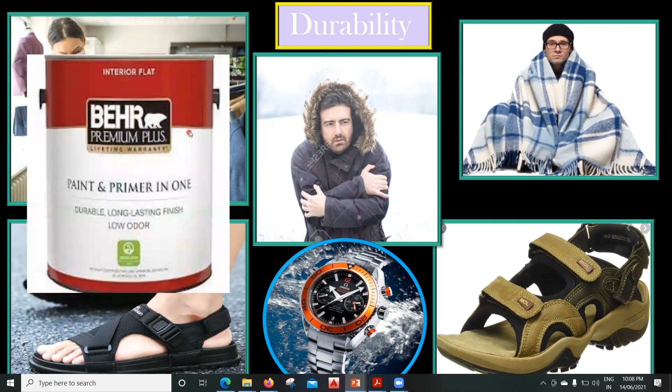Even nowadays the watches you get are also water resistant, right? So everywhere we have durability. In the same way, my structure also has to be durable in nature. And also, if you see the paint nowadays, you can see it's written durable, long lasting, something which has to last for a very long period of time, right? So having said this, we'll try to see what exactly is durability.

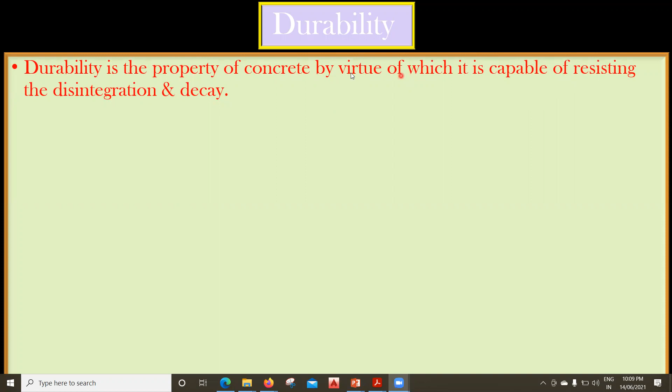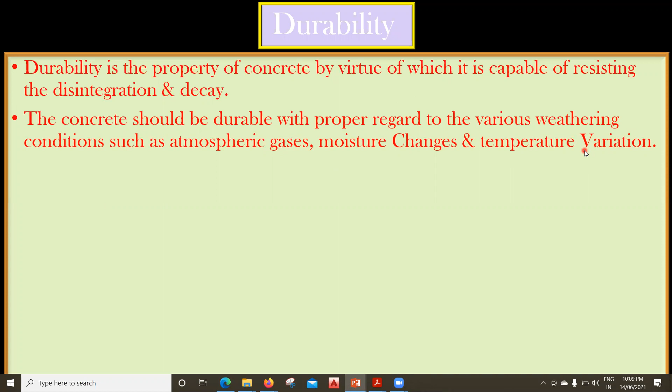So durability is a property of concrete by virtue of which it is capable of resisting disintegration and decay. The next is that the concrete should be durable with proper regard to the various weathering conditions, such as the atmospheric gases, the moisture changes, the temperature variations, as we saw, like the rainy season, the summer season and all, right?

So if you refer to Indian Standard, IS stands for Indian Standard. IS 456:2000 defines durability as: a durable concrete is one that performs satisfactorily in the working environment during its anticipated exposure conditions during service.

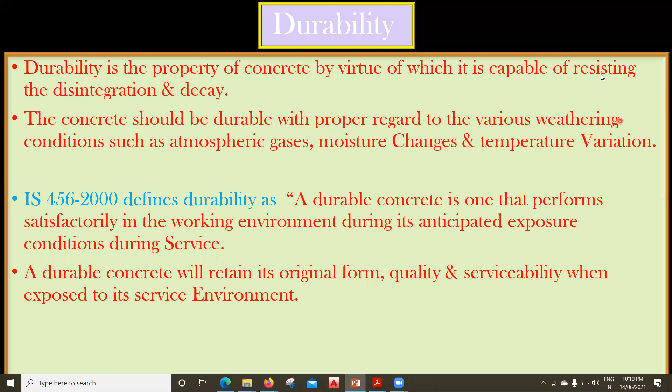The next point is that a durable concrete will retain its original form, quality and serviceability when exposed to its service environment, right? Whenever you put any structure to use, let us say you're putting up a house, we want that house to last at least 30 to 40 years, so that it will remain in the original shape. The quality will be good, it will be serviceable. That means there won't be a lot of corrosion, there is no spalling of concrete, whatever the environment may be, rainy season, winter season. So now, other than that, we have another 2 points.

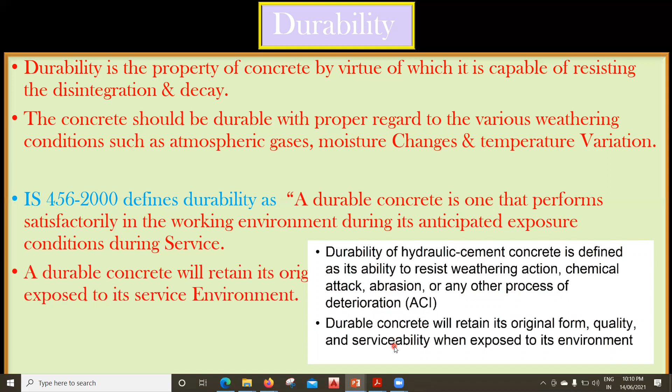Durability of hydraulic cement concrete is defined as its ability to resist weathering action, chemical attack, abrasion, or any other process of deterioration. This is according to ACI. You have to write this. If you want to follow the American Concrete Institute, which stands for ACI, this is the definition they have given: durable concrete will retain its original form, quality, and serviceability when exposed to its environment, as we have understood so far.

So up to 30 to 40 years, the house I'm putting up should be durable in nature. Durable in the sense, there should not be too much deflection, and there shouldn't be cracks, corrosion, or spalling of concrete, right? So all of this is related to durability. In the same way, this is just for a house. Now imagine the Statue of Unity.

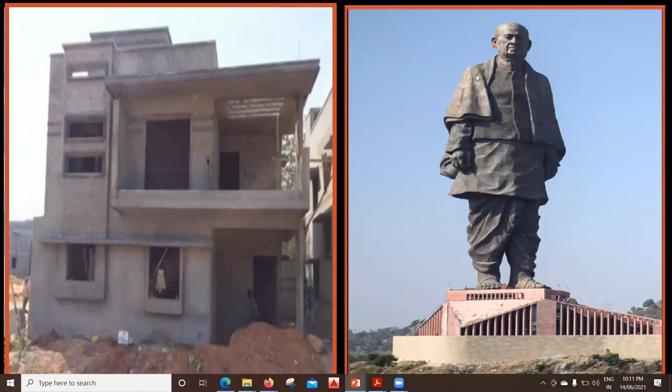So when we put up a monument something like this, we want this monument to last long for thousands of years, isn't it? And just imagine the way this statue is put up. It's almost 182-meter height, and when the height is somewhere close to 182 meters, it will be subjected to heavy winds here. And also it is on the coast of river Narmada, and also imagine the exposure conditions and all, right? So this structure has to be more durable in nature.

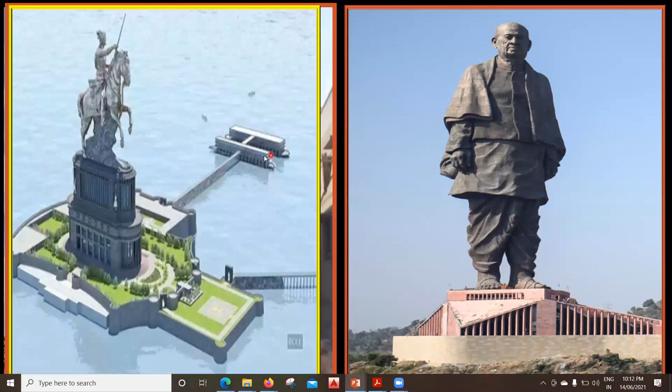In the same way, this is one of the projects coming up in Mumbai, the statue of Chhatrapati Shivaji Maharaj. And we know that Mumbai falls in the coastal region, and there will be a lot of salt in the atmosphere, and the chances of this decaying over a period of time are more. But you have to take a lot of care so that this monument will not fail, and they are going to remain there for thousands of years to come.

So, having said all these things, we'll try to see what is the significance of durability. A durable concrete has a long-term ability to resist wear and tear, to resist chemical attack, and to resist polluted atmosphere, and so negligible cost on repair and maintenance, right? So there shouldn't be frequent maintenance of the building. Once we put up the structure, from a durability point of view, it has to remain there and it has to perform for which it has been put up.

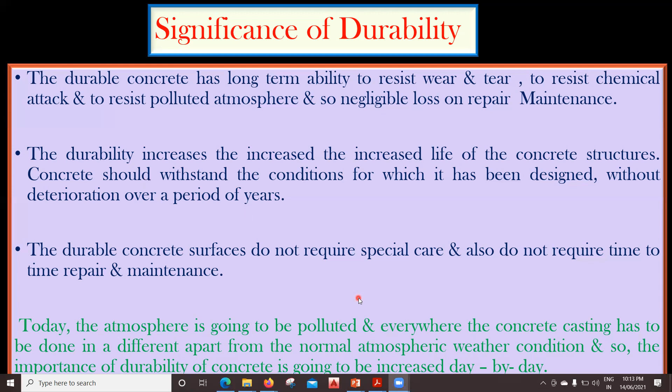Durability increases the life of the concrete structure. Concrete should withstand the conditions for which it has been designed without deterioration over a period of time. A durable concrete surface does not require special care and does not require time to time repair and maintenance. But today the atmosphere is polluted, and concrete casting has to be done apart from the normal atmospheric weather conditions, so the importance of durability of concrete is increasing day by day, and we have to take a lot of precautions when we pour the concrete, right?

So what are the factors which affect the durability? According to the syllabus we are referring to, we have two: external factors affecting the durability, and internal factors affecting the durability. In the external factors, we have physical, chemical, and mechanical. Chemical: we will try to see the sulfate attack, the chloride attack, the acid attack and all. Then we have environmental, such as occurrence of extreme temperatures, abrasion, and electrostatic action. When I say extreme temperature, during summer the temperature will shoot somewhere close to 50-55 degrees Celsius, so at that time there shouldn't be a significant change in the building, right? Next is attack by natural or industrial liquids and gases. So these are the external factors on which the durability is going to depend.

Next, coming to the internal, that is alkali aggregate reaction: if there are alkali contents in the aggregate, the reaction is going to happen, and because of that, cracks are going to happen. Next is volume changes due to difference in the thermal properties of the aggregate and the cement paste, because there will be change in the temperature. During the night time, the temperature will come down. During the daytime, the temperature will go to the maximum. So due to that difference in temperature, each material will behave in a different way, and as a result cracks are going to happen. So this is the second point.

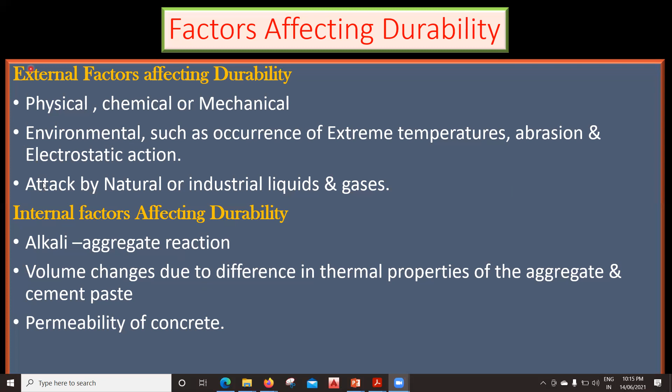The third is the permeability of concrete. Again, if cracks appear, then what will happen? The water will try to come inside, and if water comes inside the concrete, it will start to react, and a lot of corrosion and other things are going to happen. So these are the different things on which the durability of my concrete is going to depend. Now, if you refer to the Indian standard, there are separate clauses given from a durability point of view. So we'll try to see all those things.

So coming to the durability of concrete, you can try to go through this. A durable concrete is the one that performs satisfactorily in the working environment during its anticipated exposure conditions during service. And the factors influencing the durability, we have seen that. Along with that, you can try to write these factors also.

The factors influencing the durability include the environment, the cover to the embedded steel, the type and quality of the constituent materials, the cement content and the water cement ratio of the concrete, workmanship to obtain full compaction and efficient curing, and the last is the shape and the size of the member. Along with that, there are certain other points what is given in the Indian Standard Code Book.

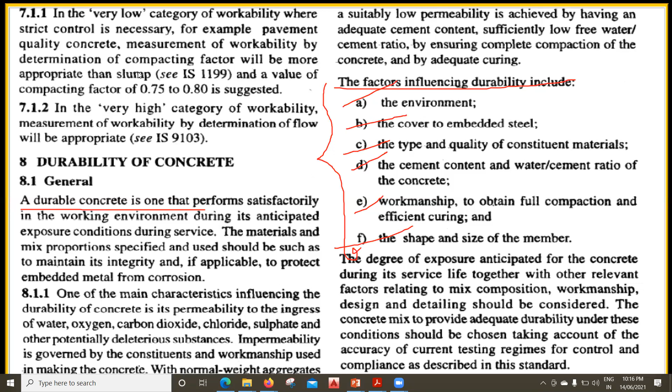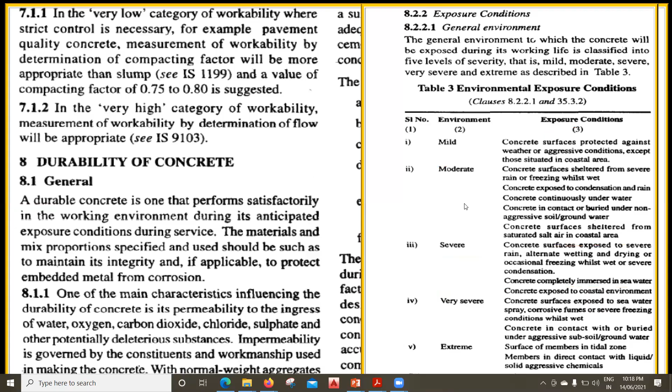So based on this we'll try to decide what kind of building I'm constructing, and based on that these things will be finally decided. But for a normal structure, we usually go with a mild or a moderate exposure condition. Again, when we go for high rise buildings, in that case we have to decide whether it is severe, very severe or extreme condition. Now once you select that, the next is that you have to decide what grade you want to use based on that. So for that, it's given in the Indian Standard Code book. Again, if you refer, it's very simple to understand.

So let us say your exposure condition is mild, and we want to put up an RCC structure. This is given for PCC. As of now, forget about this. Just concentrate on the RCC part here. So for mild, you have to use minimum 300 kg of cement per cubic meter, and the maximum water cement ratio you can use is 0.55, and you have to go with a minimum M20 grade of concrete. So all these are given from the exposure point of view, keeping the durability in mind. So whenever we put up an RCC structure, the minimum grade we have to use is M20.

Let us say you are putting your structure in the severe condition. So corresponding to severe, you have to go with minimum 320 kg of cement, and your maximum water cement ratio should be 0.45. You cannot go beyond 0.45. And in a severe condition, the minimum grade of my concrete is M30. Even if you're constructing a small house close to the coastal region which falls under the severe condition, the minimum grade you have to use is M30. But it all depends. It's not that everyone follows all these things. So again, all these are given from durability point of view.

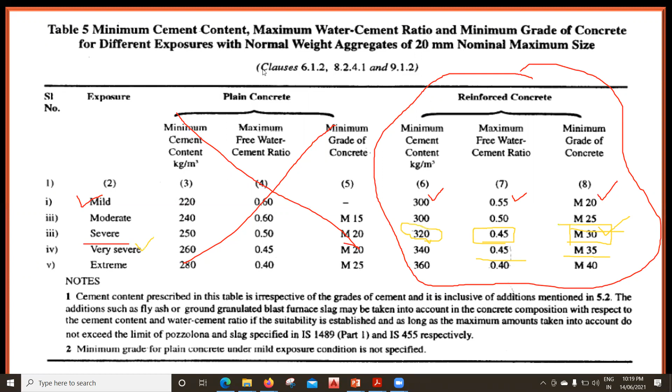Similarly, if it is a very severe condition, then this is the maximum water cement ratio, this is the minimum grade that you have to use, right? So this is given in table number 5 of the Indian Standard Code book. Similarly, there is one more table which is given, nominal cover to meet the durability requirements. So if it is a mild exposure, then for the nominal cover, we'll see what concrete cover is in the next slide, minimum you have to give 20 cover.

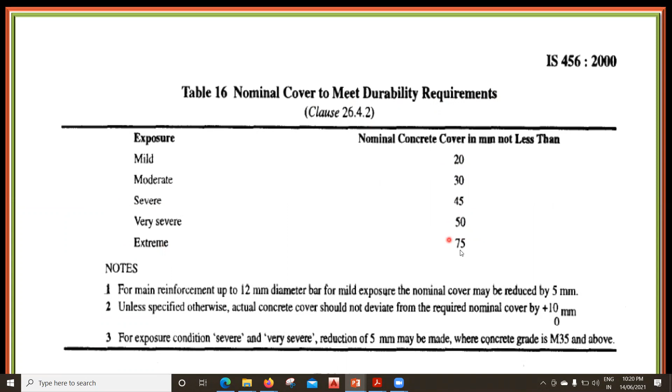If the exposure condition is moderate, then you have to go with minimum 30 cover. If it is a severe exposure, you have to go with a 45 cover. If it is very severe, then minimum 50 cover has to be given. And if it is extreme, then you have to go with 75. So what is this 20, 30, 45, 50? That we'll try to see now. So this is called as cover blocks.

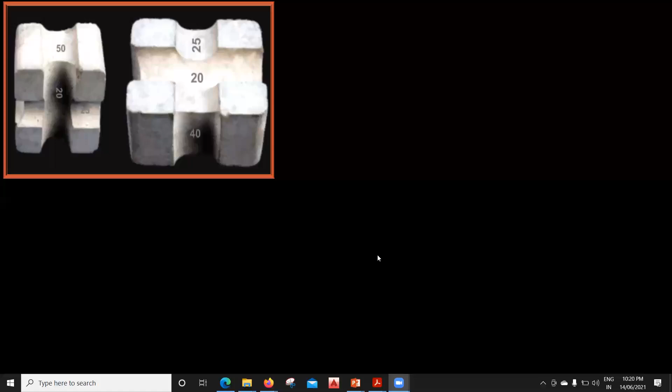These are called cover blocks. So whenever we put up our structure, we'll keep this cover block, right? So whatever numbers we have seen, those numbers are written here. This is 25, this is 20, this is 40, then we have 50, then we have 20 and 25.

Now let us say you are putting up a column. For the column, the cover has to be 40 minimum. So what we are supposed to do is take this cover block, and this is 40, right? So this 40 will be kept here, and when you place the concrete, there will be a gap of 40 between the outside of your concrete and the rebar.

So this gap between the outer face of your concrete and the outer face of this rebar is 40, and that 40 we are going to keep with the help of this cover block. This is given from a durability point of view. Similarly, let us say this is a slab. In the slab, usually we go with 20 as a clear cover.

Otherwise, if you don't maintain this, if you directly keep it here, what will happen? It will get exposed to the air, and as a result, corrosion is going to happen in the rebar. And if corrosion happens, the durability of my structure is going to come down. In order to avoid that, if I want 20, I'll take this 20 cover block and keep it, like you can see they have kept it here. This vertical distance from here to here will be 20.

Similarly, this is a beam here. In the beam, we try to maintain 25 mm. So this is 25 mm here. So keep a cover block here. Now the gap between the outside of this concrete, once you pour the concrete, and actually the outside of the stirrup, will be a 25 mm gap. That is given from the durability point of view.

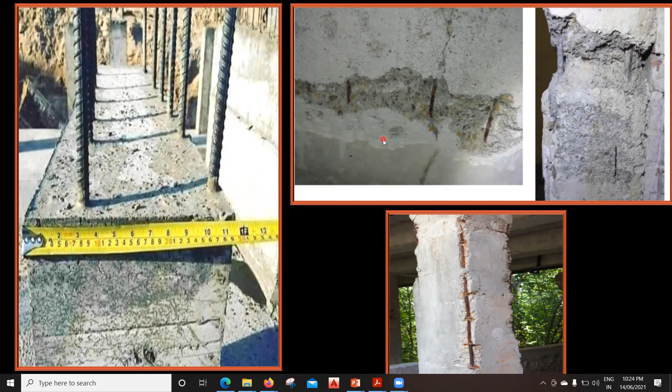But in the end, what is going to happen? The entire life of the structure is going to come down, right? So I hope you got an idea about what durability is, how to understand it, its practical importance, what a cover block is, and why it has to be kept. Everything is given from a durability point of view.